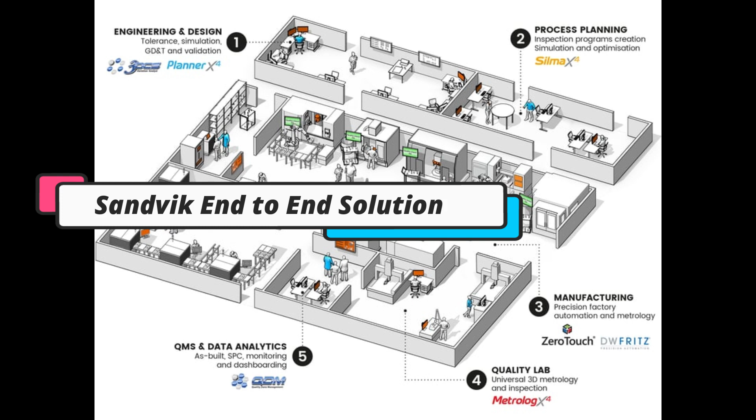What is the value for a customer? The value for a customer is to simulate the quality even before a part or assembly gets produced, to figure out how the datum, the reference system, should be set, how the tolerance concept should be set, how the values should be set, so that it's not too tight but also not too loose.

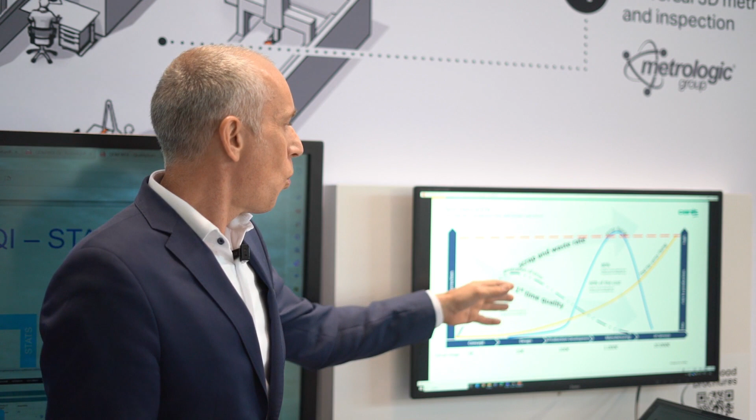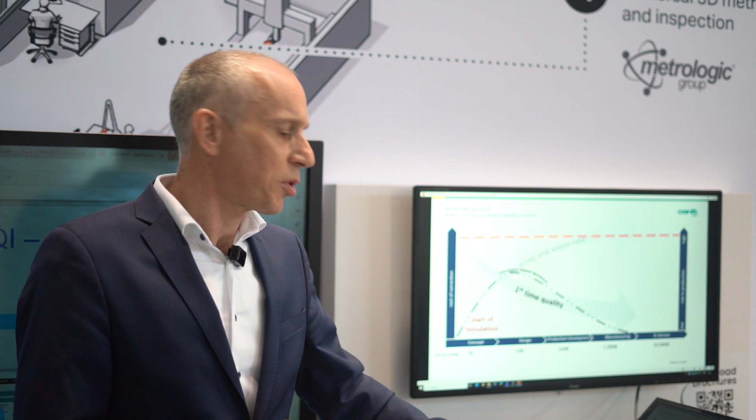And very often when we visit a customer, we find this situation here on the screen where they have a high risk of production due to a huge scrap and waste rate and a low first time quality. And this mostly happens when the fixing starts at manufacturing. So how can we turn that around? The point is we have to start production quite early, and the production I'm talking about is simulation. So therefore, we don't call it tolerance calculation, we call it a virtual or digital prototype.

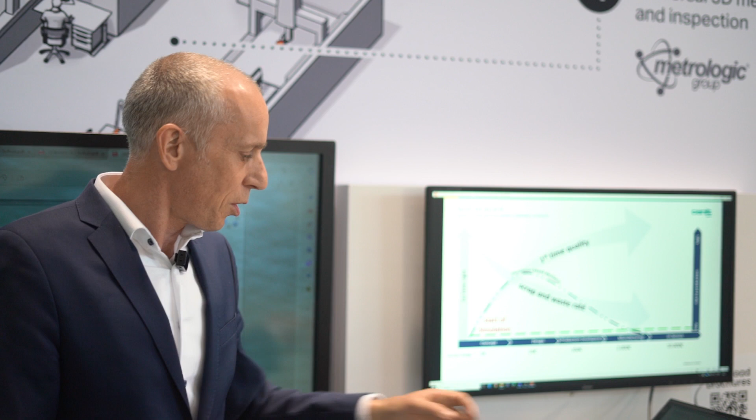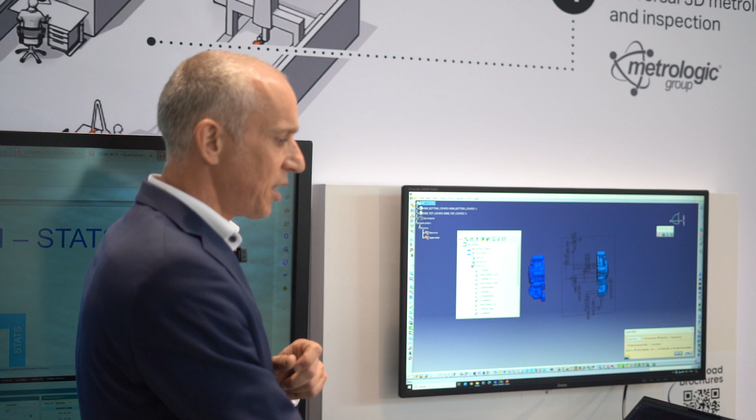Let's have a look at the digital prototype and how easy it is to set up such a simulation. So now we are in the CAD and we have our parts, and inside the parts we have the 3D PMI, but also the constraints. So just one or two clicks to hand over all the things we already created within our CAD tool. So hand over the 3D PMI, but also how the part gets assembled by

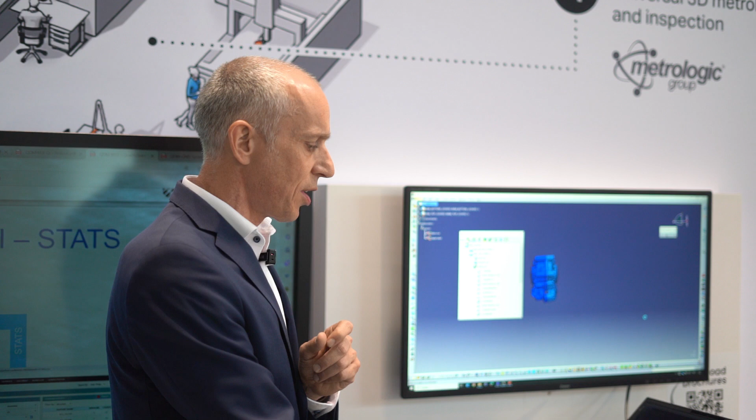the manufacturing. And now we just make a nominal build to assemble that and run the simulation to figure out if the design strategy, the tolerance strategy, the measurement strategy is exactly what we need to secure our quality expectations. And then probably we find out that on our measurement, let me go to the right one, we face some out of specification. And what we also find is what is guilty of that result. So what do we have to change?

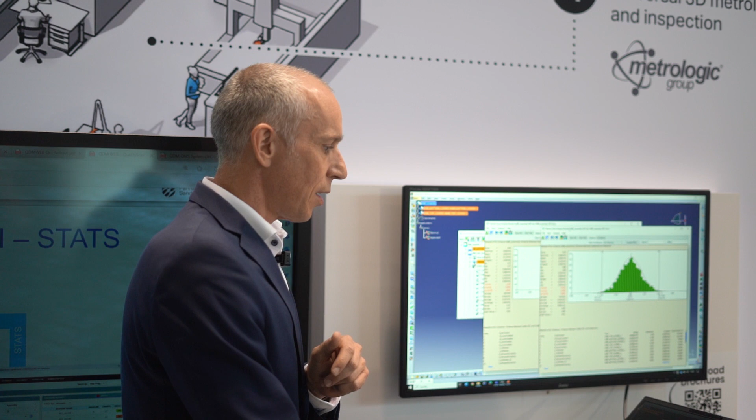And it's just by a double click that we can change. So how is the normal behavior on the customer side? They get an idea, send it back, the tool will be changed. It takes weeks until you get the part back just to recognize, oh no, that's not the right direction, and you do it forever. And you can shorten that time dramatically to seconds, because as I said, I just make a double click and rerun the simulation, and then I compare to understand whether I am in the right direction or not. It takes just some seconds, and I understand if I am right or not.

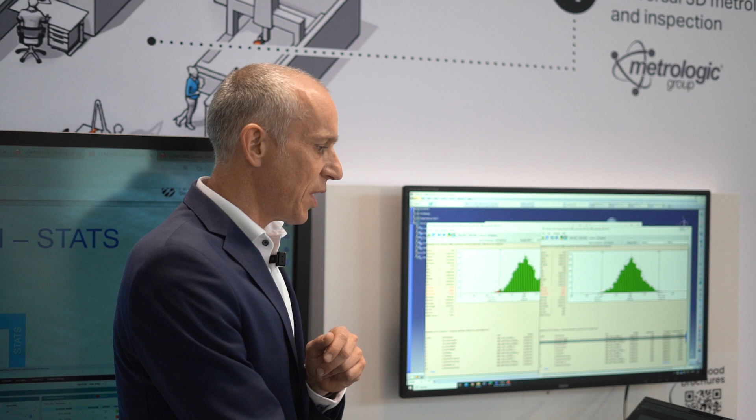Okay, let's introduce you to the end-to-end process from Metrologic. Here we visualize the Metrologic hub, and we are going to focus on the planner activity where the inspection plan will be produced to activate the different phases, steps 2, 3, and 4. Some information can come from the CAD system directly from the design, and some other can come from the 3DCS system. Let's discover what the planner is doing.

So we open the environment, and we are here to define and receive the information from the design. So I'm going to open a CAD file. These CAD files can come from the designer himself, from different CAD systems. And as you can see, it already has some information with the PMI information.

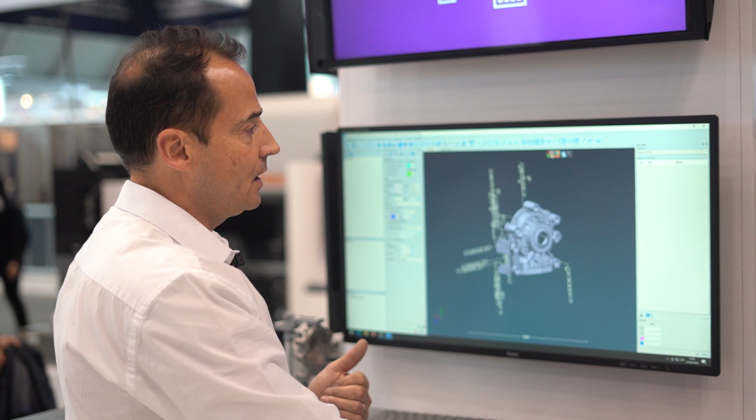So this is GD&T information that we can explore through different functionality, and we see here there are around 21 characteristics that the user is going to prepare in this phase. So according to the information we have on the CAD, we can use this kind of functionality that is going to explore the CAD and define all the features.

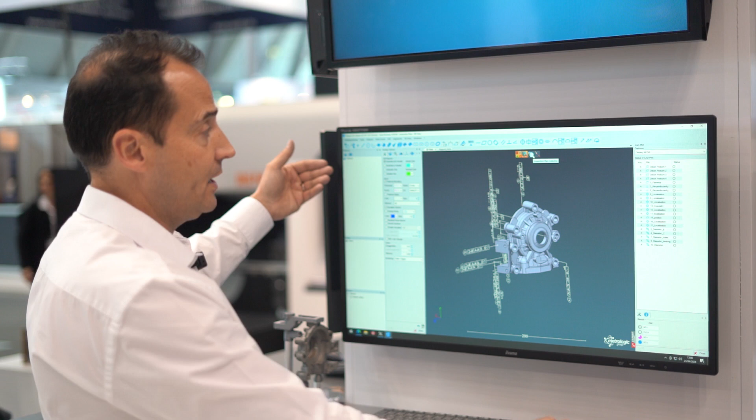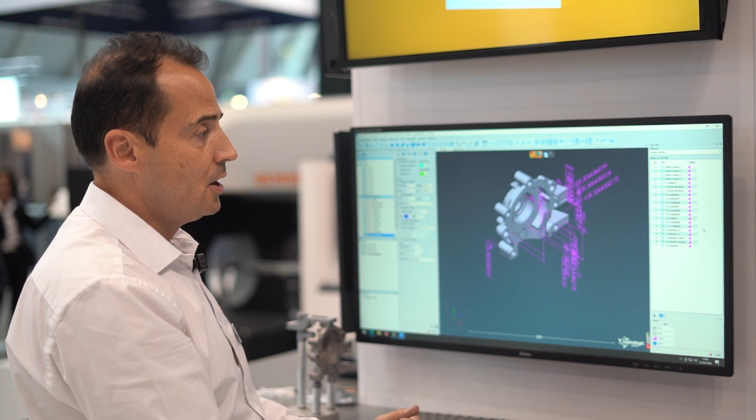So all the features are going to be extracted from the CAD with only one click, like this, and we have prepared all the features coming from this kind of characteristic, the feature of cylinder or some other GD&T information that the customers would like to address. As you can see here, this characteristic is completely readable because they are fully semantic. Let's go now deeper, because in this prepare phase, we already have our inspection plan.

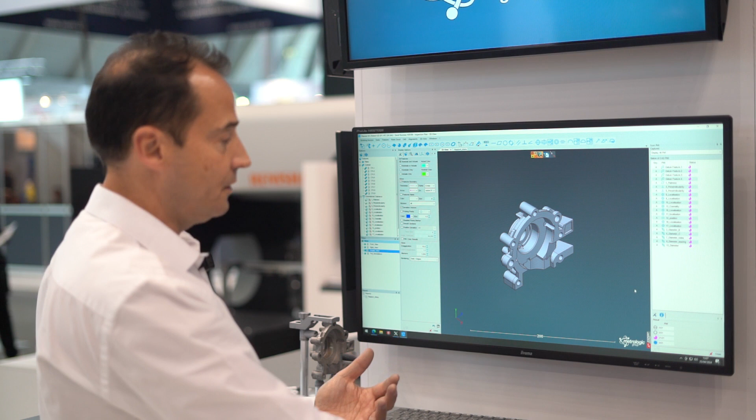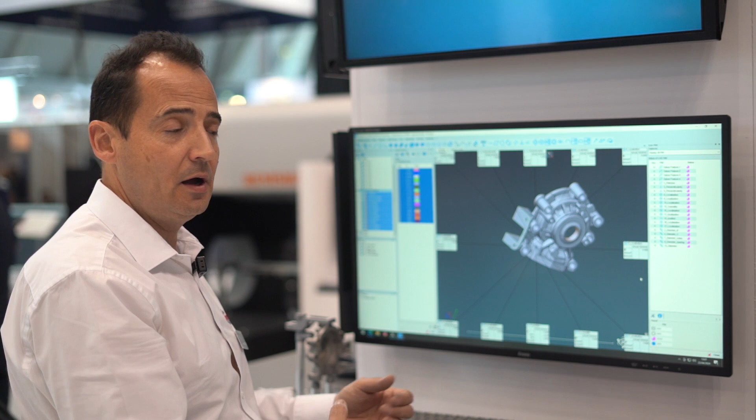These are all the features we have to measure, but we also have the capability to prepare some different views for the treatment of the information. Let me set a few parameters to explore the value, and maybe I can prepare a view by selecting my features, making a right click here, and I already prepare my view so that when I receive the characteristics from the measuring and execution phase with online inspection software, I will be able to store it, and I've got my view. Let's save this view. And I can recall this view according to the different application, and of course I will get this view.

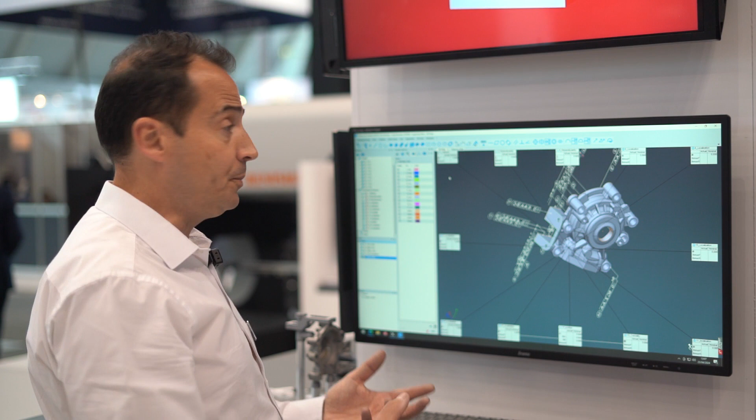Now, the next step is to prepare my reports. It's automatically done because I received the view, I've got also the features, and if I go in my report editor, I already have the view with the stickers pre-placed with the different parameters, and I've got all the features I would like to measure. So everything now is saved, and I can now go to the step of preparation and programming with Silma. So I will just save my inspection plan on my desk or in my database, and then I finish, and we can go to the Silma phase.

So here, this is Silma, the offline simulation tool. Here you will be capable to recreate your environment in the simulation, what we call the digital twin. Here it's a CMM, but it can also be a robot, and we can also manage different technologies like tactile or optical sensors. Using Silma and its digital twin, you will be able to recreate the virtual cell in order to anticipate the cell you will have in reality. So it will help you to prepare all the steps for the analysis offline, to reduce the downtime on the real cell, because the challenge is to stop the cell the minimum time in order to not stop the production.

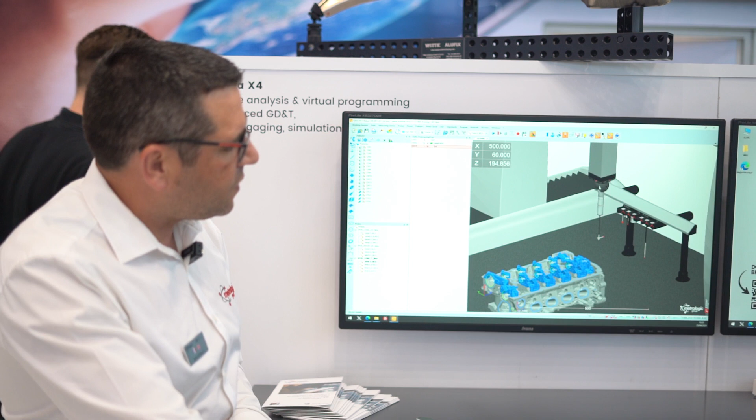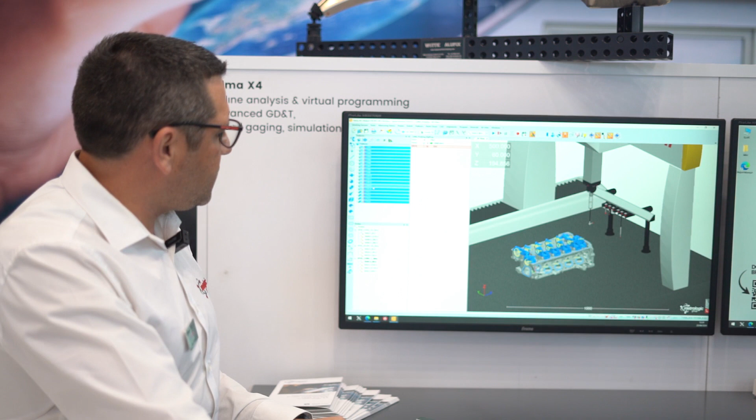So here, this is Silma. You can see that we have our configuration. Here it's SP25 probes using a tool changer, but it can be any brand or any technology because we are universal. And here we came in Silma with our inspection plan. This plan is coming from the prepare phase, from Planner, and here we will reuse the same plan. So the next step is to create the part program. Thanks to Silma, you will also have the possibility to use smart tools like inspection path planning. Using the path planning, we will create in only a few clicks the whole part program with an optimized, collision-free path.

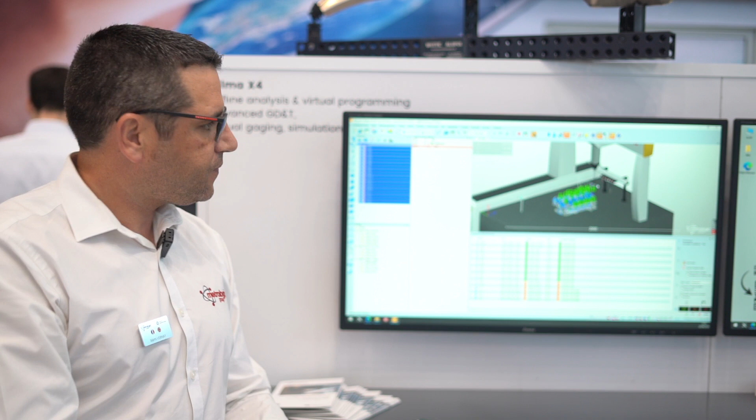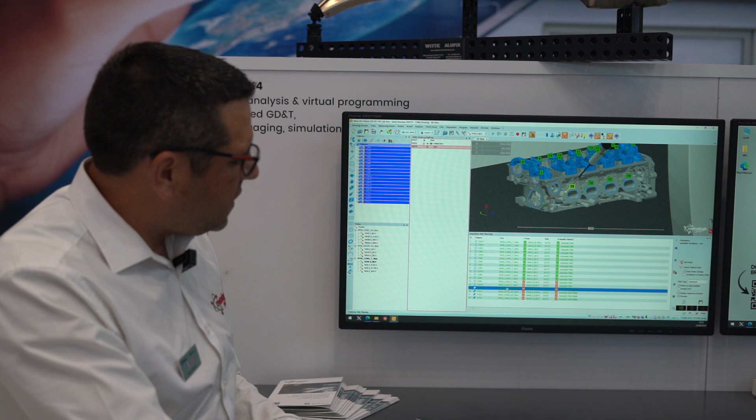So the software will select for you the right tool in order to avoid any collision, and also the right head orientation, and optimize all the steps in order to have a good path and be able to push it to production. So here at the end of the computing, you have a summary of what happened. For example, for this feature, the software decided to use this probe orientation. But for this feature inside here, since it is a tricky access, the system decided to use another tool. So you have a summary of which tool has been selected, which probe, the evaluation method, and whether there is a collision or not.

When you validate this panel, here you will see inside the program all the lines coming here, and this program will be saved and sent to the next step, so in Metrologic, into the shop floor.

Okay, so here is the new machine from DWFritz and Metrologic. It's the zero-touch machine. The target of those machines is to inspect 100% of your parts. For years, industrials decided to have automated cells, but one thing was missing: the inspection. So those machines are dedicated to inspect all your parts, 100% of parts. The technology used is a non-contact system, so it allows you to inspect family parts.

For brake discs, for instance, you can inspect the smallest brake disc to the big one without changing the configuration of the machine. Then the cycle time is really short, so we cope with production cycle time. For a brake disc, it's around 20 seconds to inspect one brake disc, dimensional and defect detection.

How it usually works is that the laser light sensors are able to extract a point cloud, and the expertise of the company is to calibrate all those sensors together and extract a full point cloud of the machine. Usually people are used to having like 10,000 points, and with our solution you will get 18, maybe 20 million data points. Metrologic X4 was one of the software able to integrate those point clouds.

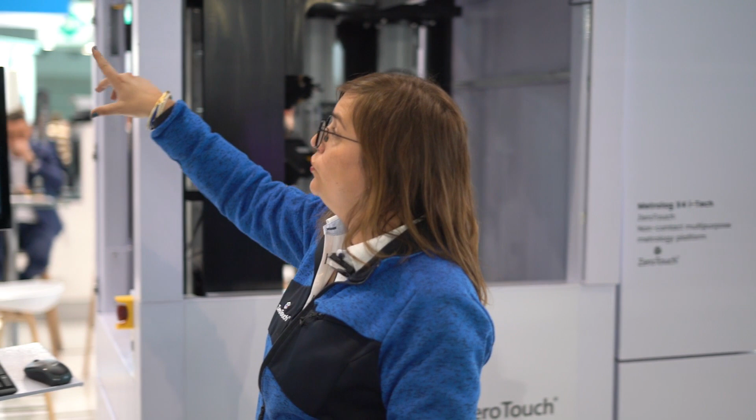The benefit is that you can do it from your desk. You don't have to stop the machine, because it's a production machine, and then you integrate all the features directly in the machine. So you can see here on the screen that all the point clouds were integrated, and then you will get all the data analysis just here. So we are on the Metrologic execution of the end-to-end process. It gives us the possibility to run the program that has been learned from Silma. And voilà.

The benefit of using Metrologic is that we are a universal solution that can interface to every kind of system. Here, for example, behind me, we have the 5-axis system from Renishaw. Metrologic is connecting to the I++ server of Renishaw, and the benefit we bring to this solution is a really good user experience thanks to our 40 years of experience in metrology.

For example, on this kind of 5-axis or robot solution, it's difficult for the user to program because of the rotation and translation of the system. The added value of Metrologic is to bring graphical tools and intelligent automatic path measurement to help the customer exploit the maximum capability of this kind of solution. And after we have generated the program, Metrologic is going to connect to every kind of system and run the program with the most optimized cycle time.

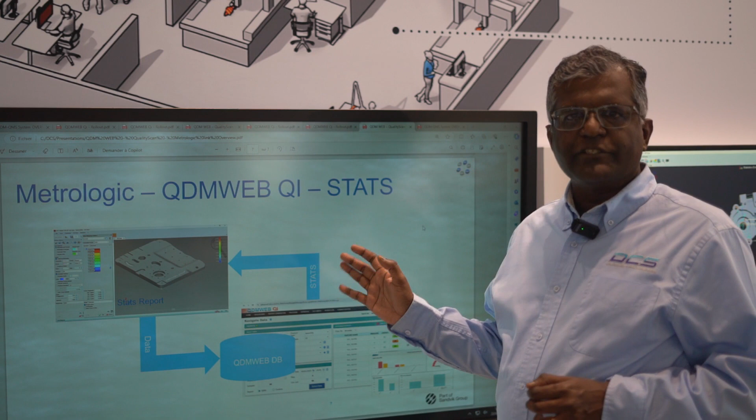So here at the show, at Control Show 2024, we are showcasing our product, QDM Web QI, integrated directly with Metrologic products. What we are demonstrating here is all these devices, Metrologic tools running on the inspection devices, collecting data, and as soon as the data is collected, it is directly loaded into the QDM Web system before the program is completed.

So the system can live monitor all the data, and as soon as any SPC alerts are triggered, it can send out email alerts to the stakeholders. With this integrated system, email alerts become real time and systems can be monitored as parts are measured on the Metrologic tools. We are also demonstrating another interface component where data collected in QDM Web provides SPC analysis, and that SPC analysis is fed back to the Metrologic viewers. So Metrologic viewer can access QDM data and provide SPC results to the customers.

So once you have finished your execution operation, you will want to manage your results in order to manage your process. To do that, we will use our X4 iViewer solution.

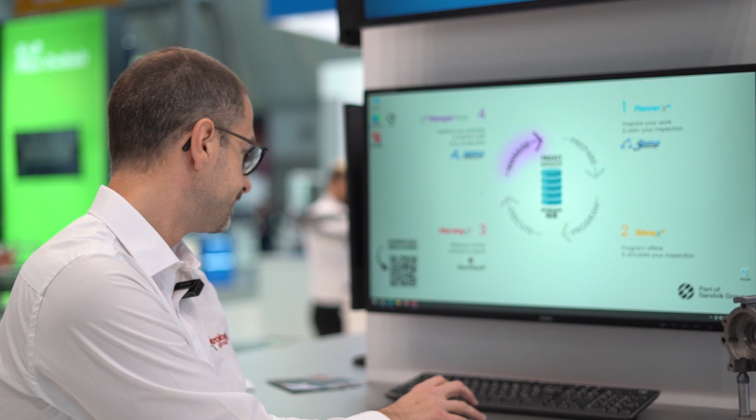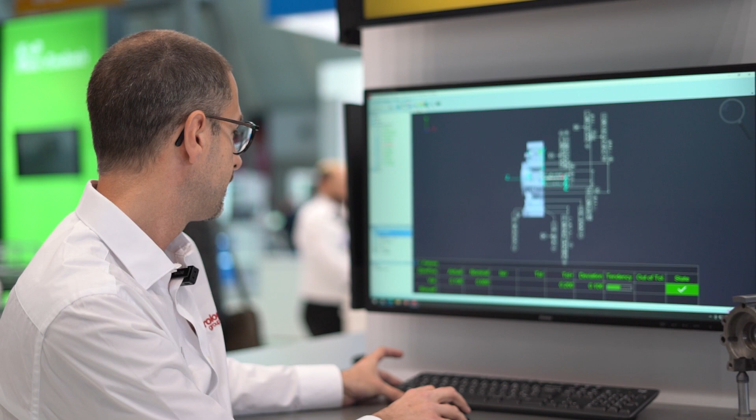You can go look at the detail of your results in order to better understand what the issues are coming on your parts. You can, of course, use all our advanced detailed view and all the possibility of analysis and display in order to make your analysis and better understand if your part is really good or if there are some issues during your production.

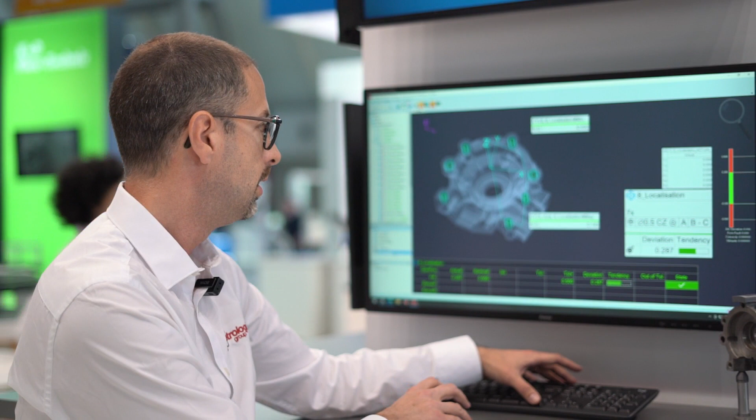We ensure the analysis of any kind of geometrical tolerances or distance angle evaluation, and you have the possibility to finish the setup of your report inspection in order to send it for printing or PDF file in order to share these results with, for example, your subcontractors.

Once this analysis job is done, you are able to manage your process in order to correct your production in order to generate better parts. In the end, these results here are visualized with iViewer, but of course, these results could be inspected through a statistical tool.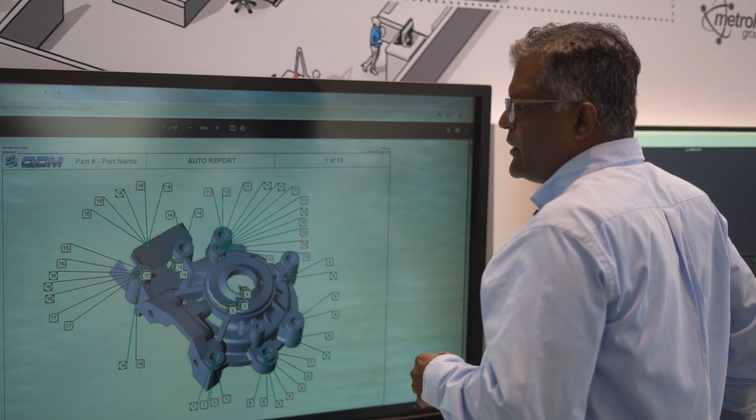And right now there are 43 samples, and we would like to quickly see a report for the last 10 samples. The system automatically generates a real-time report with CAD graphics, with leader lines pointing to where the measurements were taken, followed by SPC charts for all the metrics, real-time metrics. So all the quality engineers are looking at the data with a graphical SPC reporting format for all the parts and the bill of materials that's made within the organization.

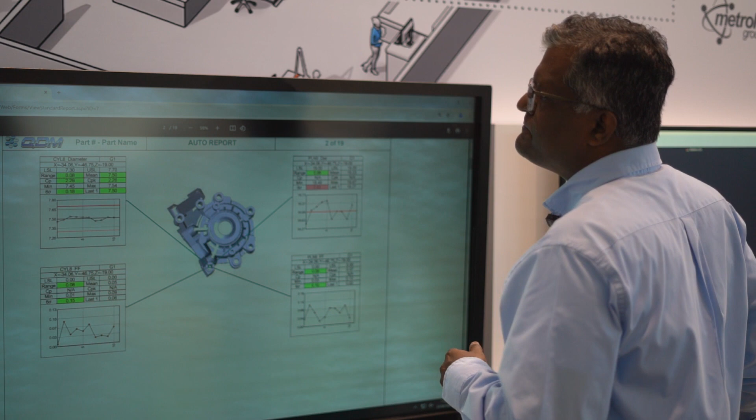The system also has an inbuilt quality collaboration platform, which allows the quality engineers to interact and collaborate within the QDM web system for all the quality problems and all the root causing. For example, in this particular case, there was a mean shift that happened, and the quality engineers put the system on monitor, and then another quality engineer went and fixed the process, and now the problem is resolved and the process is stable. All the quality collaborations of process corrections are stored within the system for future root causing and problem solving.

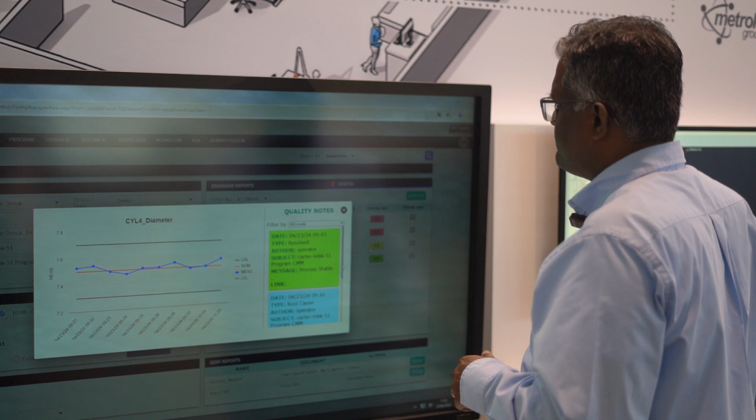And the third component is a system-wide management dashboard that's integrated within the platform, which allows you to look at your entire company on one screen where all the data is coming from. In this particular case, it's the show. All the data that's coming from the show is rolled up, so you can get quality metrics at a system level, at a plant level, at a program level, and at the supplier level.

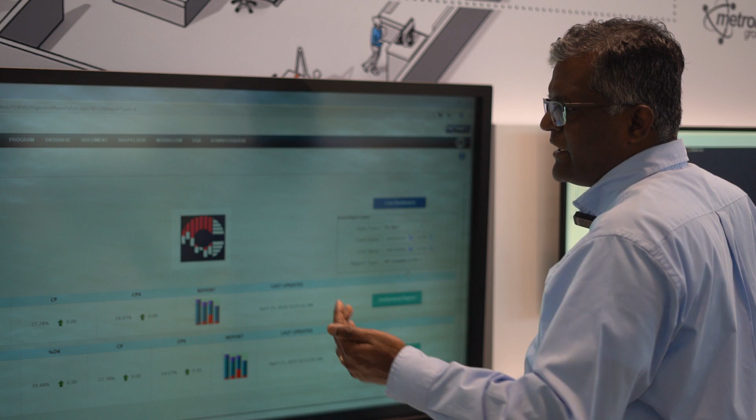And drilling down one level at a time, it takes you to the part level. Look at your part quality, and from here go to the entire part quality report. So the system has the mechanism to go from a system-wide dashboard all the way to an individual part and its SPC. So these are the overall key functionalities within the system and the key benefits of having a centralized web-based portal to look at your quality data.